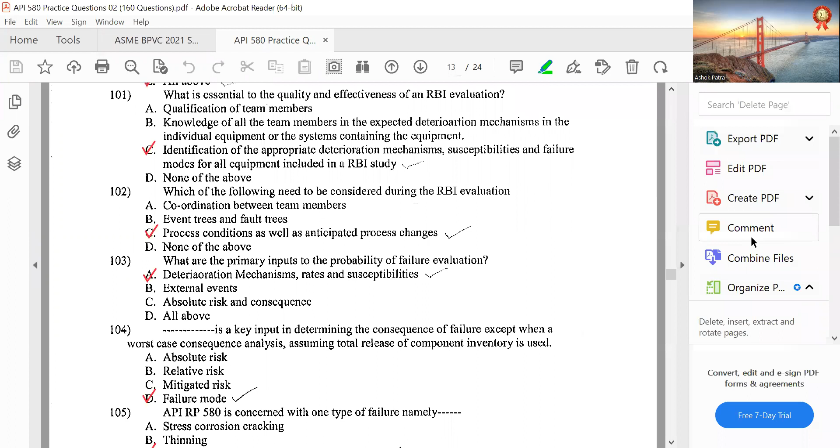API 580. So, what is essential to the quality and effectiveness of RBI evaluation? Identification of appropriate deterioration mechanisms, susceptibilities, and failure modes for all equipment included in an RBI study.

Which of the following need to be considered during RBI evaluation? Process conditions as well as anticipated process changes. What are the primary inputs to the probability of failure evaluation? Deterioration mechanisms, rates or susceptibilities.

Blank is a key input for determining the consequences of failure, except when a worst case consequence analysis, assuming total release of component inventory, is used. Failure mode. API RP 580 is concerned with one type of failure, namely loss of containment caused by deterioration.

Which one of the following is a deterioration mechanism observed in the hydrocarbon and chemical process industry? All of the above: thinning, stress corrosion cracking, metallurgical and environmental, mechanical, all of the above.

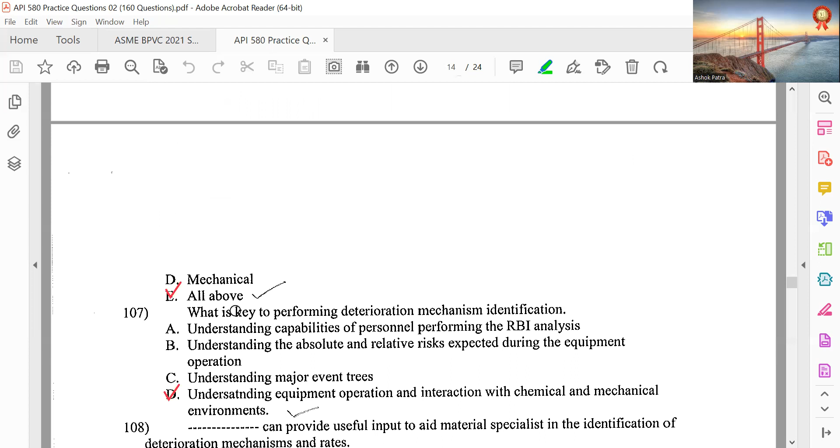What are key to performing deterioration mechanism identification? Understanding equipment operation and its interaction with chemical and mechanical environments. Process specialists can provide useful input to aid materials specialists in the identification of deterioration mechanisms and rates.

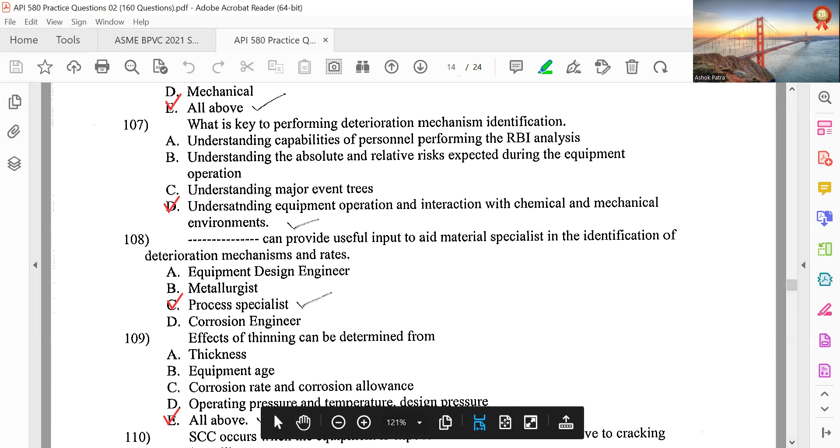The effect of thinning can be determined from thickness, equipment age, corrosion rate, corrosion allowance, operating pressure and temperature, design pressure, all of the above.

SCC occurs when the equipment is exposed to an environment conducive to the cracking mechanism, like caustic cracking, amine cracking, sulfide stress cracking, HIC, SOHIC, all of the above. Stress corrosion cracking: fabrication variables such as post-weld heat treatment, PWHT, can affect susceptibility to SCC.

True. Determination of susceptibility to SCC should not only consider the susceptibility of the equipment or piping to cracking, but also the probability of a crack resulting in a leak or rupture. One example of metallurgical and environmental failure is high temperature hydrogen attack in carbon and low alloy steel.

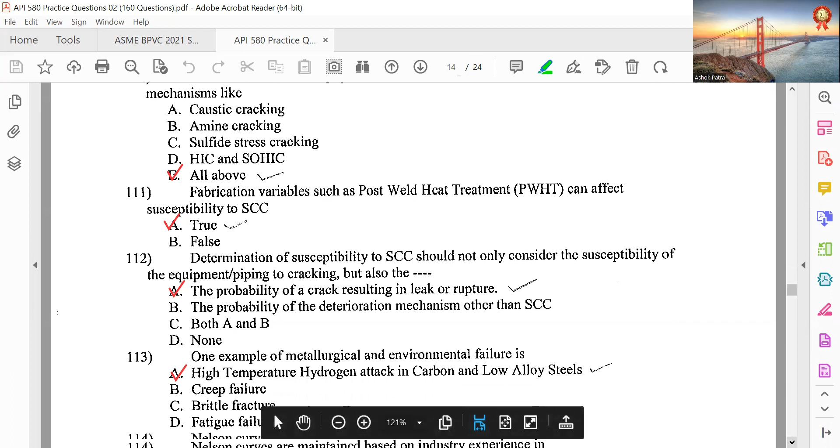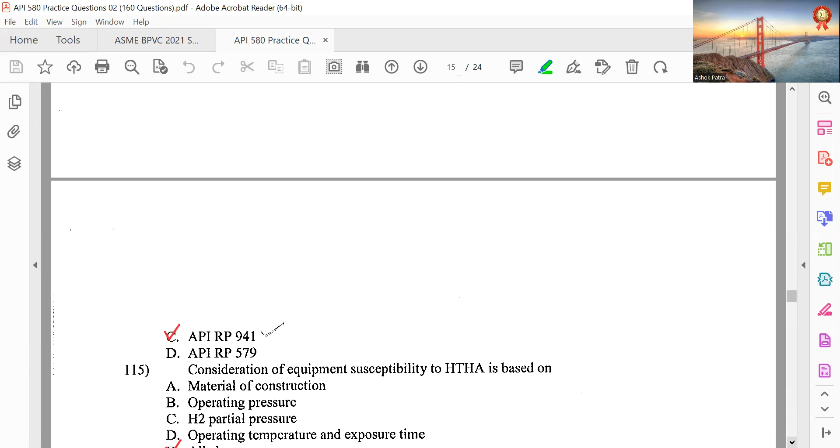Nelson curves are maintained based on industry experience in API RP 941. Consideration of equipment susceptibility to HTHA is based on material of construction, operating pressure, H2 partial pressure, operating temperature, and exposure time, all of the above.

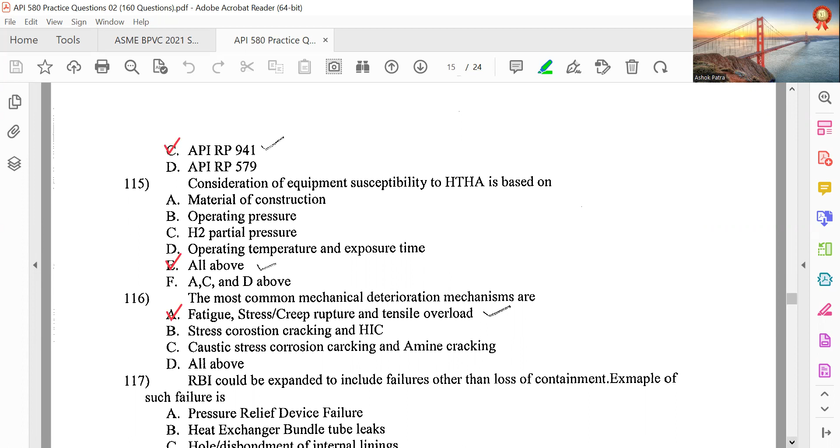The most common mechanical deterioration mechanisms are fatigue, stress, creep rupture, and tensile overload. RBI could be expanded to include failures other than loss of containment. Examples of such failures: pressure relief device failure, heat exchanger bundle tube failure, leaks, disbondment of internal linings.

Deterioration mechanisms are not the only cause of loss of containment. Examples of other causes are seismic activity, operator error, overpressure due to failure of a pressure relief device.

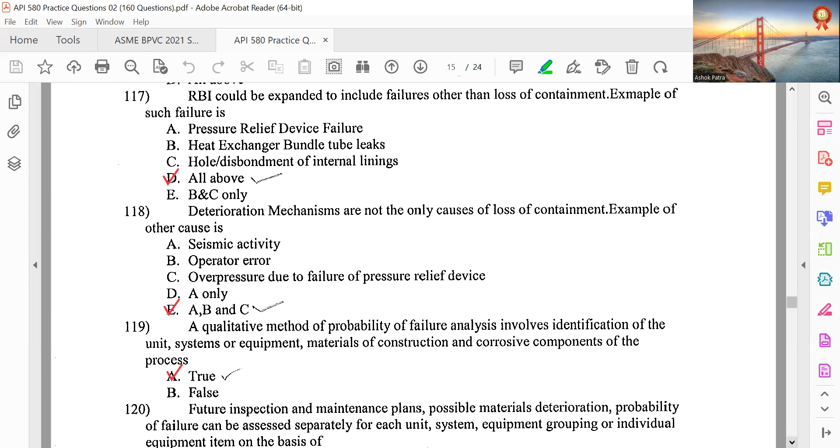A qualitative method for probability of failure analysis involves identification of the unit, system or equipment, materials of construction, and corrosive components of the process. True. Future inspection and maintenance plans, possible material deterioration, probability of failure can be assessed separately for each unit, system, equipment grouping, or individual equipment items on the basis of knowledge and operating history.

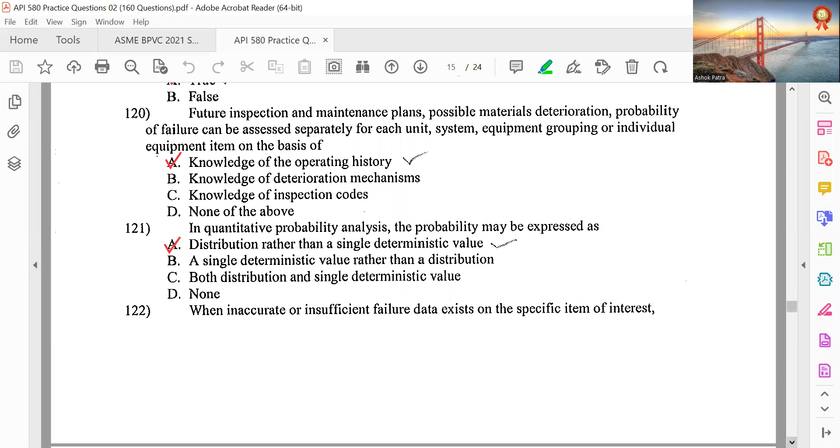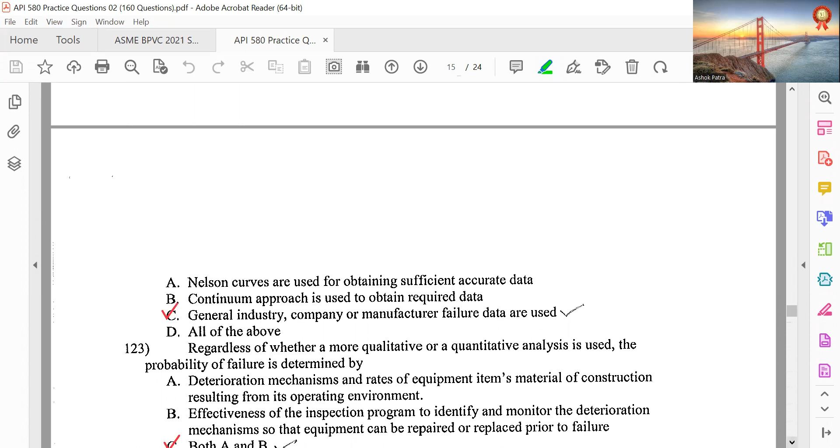In quantitative probability analysis, the probability may be expressed as a distribution rather than a single deterministic value. When inaccurate or insufficient failure data exists on the specific item of interest, general industry, company, or manufacturer failure data are used.

Regardless of whether a more qualitative or quantitative analysis is used, the probability of failure is determined by deterioration mechanisms and rates of the equipment item's material of construction resulting from its operating environment, and the effectiveness of the inspection program to identify and monitor the deterioration mechanism so that the equipment can be repaired or replaced prior to failure.

Analyzing the effect of in-service deterioration and inspection on probability of failure involves all of the above: identifying active and credible deterioration mechanisms reasonably expected to occur during the period being considered, determining deterioration susceptibility and rate, quantifying the effectiveness of the past inspection and maintenance program and the proposed future inspection and maintenance program, determining the probability that with the current condition, continued deterioration at the expected rate will exceed the damage tolerance and result in a failure.

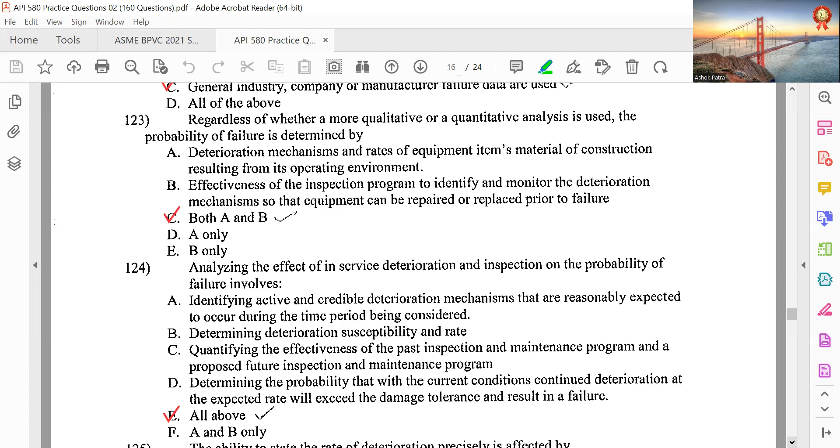The ability to state the rate of deterioration precisely is affected by equipment complexity, type of deterioration mechanism, process and metallurgical variations, inaccessibility for inspection, limitations of inspection and test methods, and inspector expertise.

Sources of deterioration rate information include published data, laboratory testing, in-situ testing and in-service monitoring, experience with similar equipment, previous inspection data, all of the above. Other sources of information on deterioration are databases, plant experience, or reliance on expert opinion.

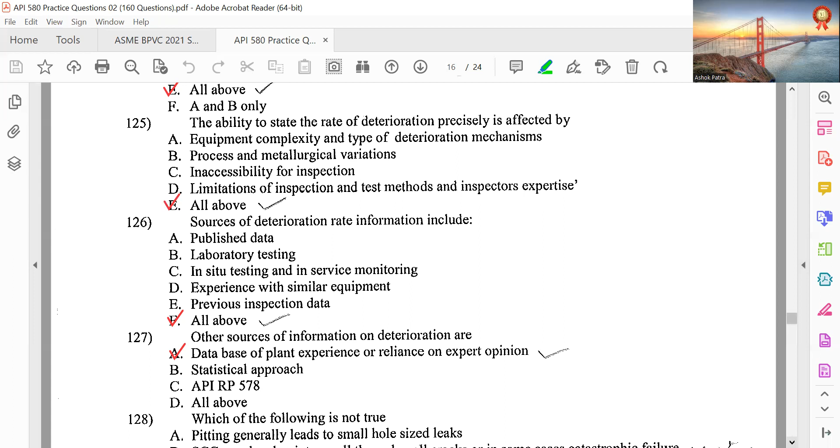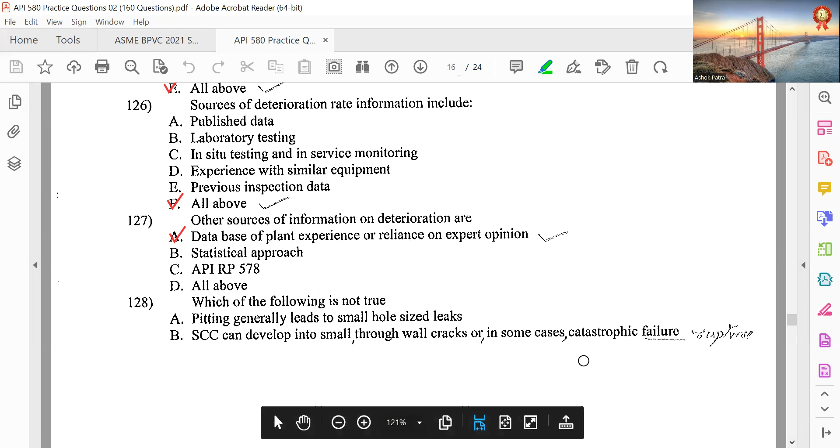Which of the following is not true? General thinning from corrosion often leads to small leaks. Pitting generally leads to small hole-sized leaks. SCC can develop into small through-wall cracks or in some cases catastrophic failure. Metallurgical deterioration and mechanical deterioration can lead to failure modes that vary from small holes to rupture. The last three are true. The first one is not true.

After likely deterioration mechanisms have been identified, the inspection program should be evaluated to determine its effectiveness in finding the identified mechanisms.

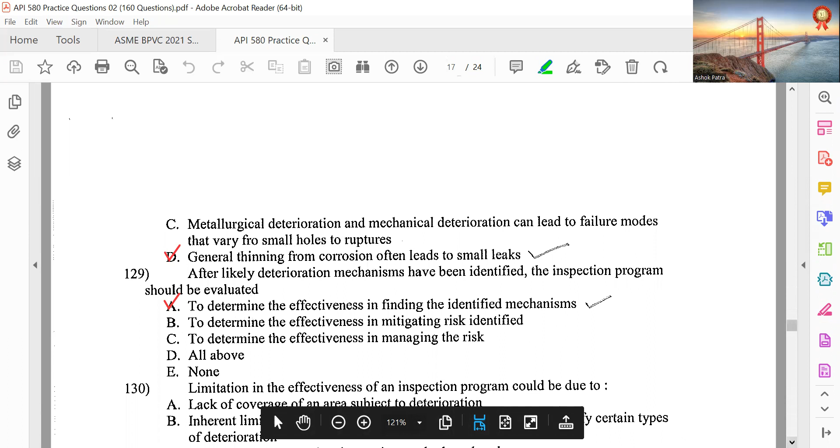Limitation in the effectiveness of an inspection program could be due to lack of coverage of an area subjected to deterioration, inherent limitations of some inspection methods to detect and quantify certain types of deterioration, selection of inappropriate inspection methods and tools, all of the above.

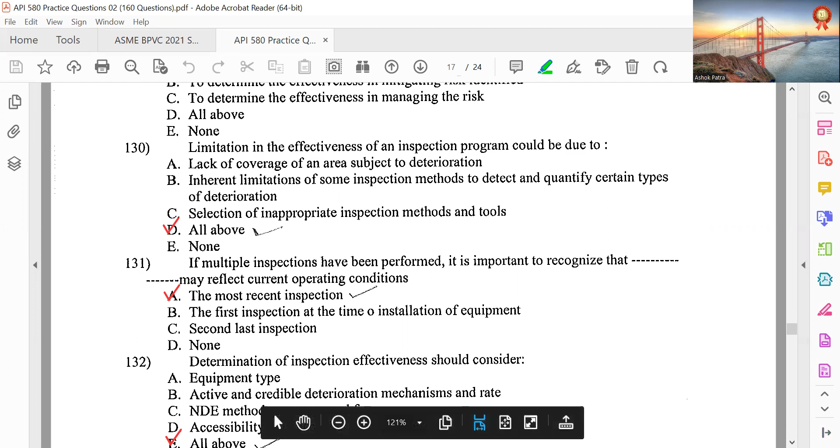If multiple inspections have been performed, it is important to recognize that the most recent inspection may reflect current operating conditions. Determination of inspection effectiveness should consider equipment type, active and credible deterioration mechanisms, NDE methods, coverage and frequency, accessibility to expected deterioration areas, all of the above.

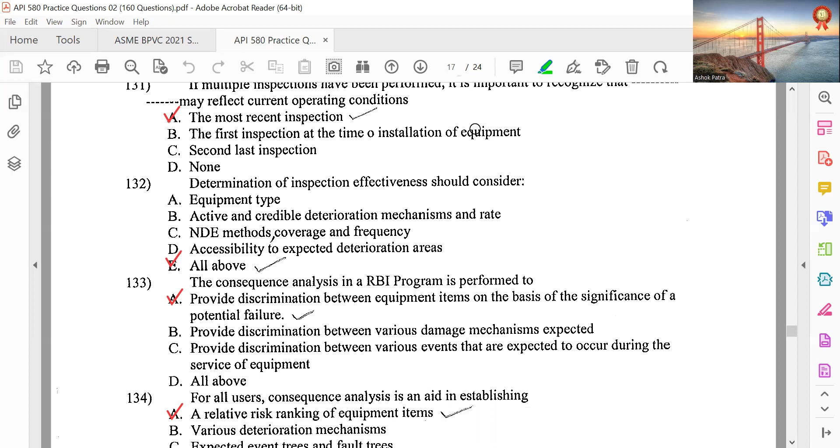The consequence analysis in the RBI program is performed to provide discrimination between equipment items on the basis of significance of a potential failure. For all users, consequence analysis is an aid in establishing a relative risk ranking of equipment items.

The consequence effects of loss of containment can be generally considered to be safety and health impact, environmental impact, production losses, maintenance and construction losses, all of the above. Functional failures other than loss of containment should include functional or mechanical failure of internal components of pressure equipment, heat exchanger tube failure, pressure relief device failure, rotating equipment failure, all of the above. The other functional failures are usually covered within RCM and therefore not covered in API 580.

Quantitative and qualitative approaches of consequence analysis are endpoints of a continuum. The other functional failures are usually covered within RCM and therefore not covered in API 580. Qualitative and quantitative approaches of consequence analysis are endpoints of a continuum.

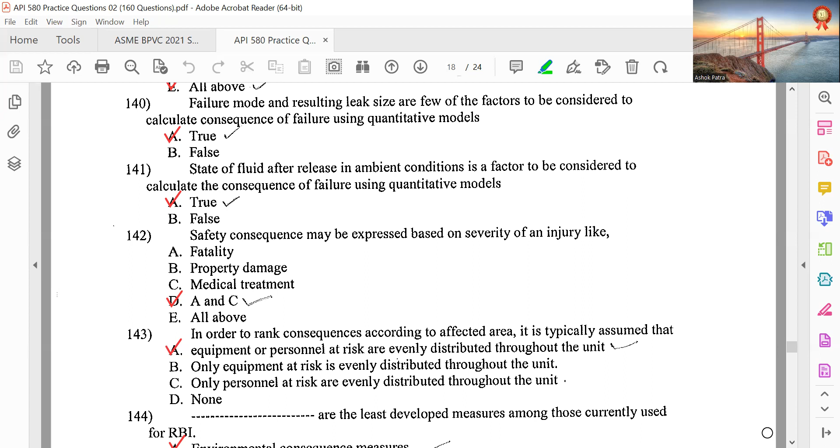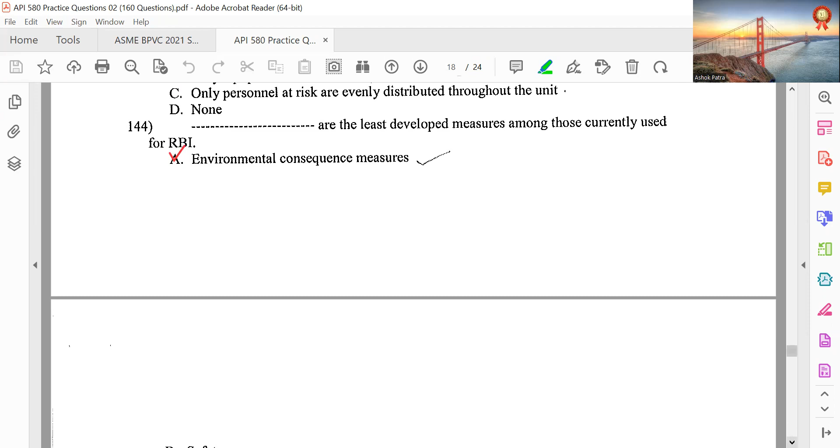State of fluid after release in ambient conditions is a factor considered to calculate the consequences of failure using quantitative models. True. Safety consequences may be expressed based on severity of injury. In order to rank consequences according to affected area, it is typically assumed that equipment or personnel at risk are evenly distributed throughout the unit. Environmental consequence measures are the least developed among those currently used in RBI.

Typical parameters that provide an indirect measure of the degree of environmental damage are acres of land affected per year, miles of shoreline affected per year, number of biological or human use resources consumed. So all of the above. In most consequence evaluations, a key element in determining the magnitude of consequences is the volume of fluid released. In all cases, volume released will be the same as volume available for release.

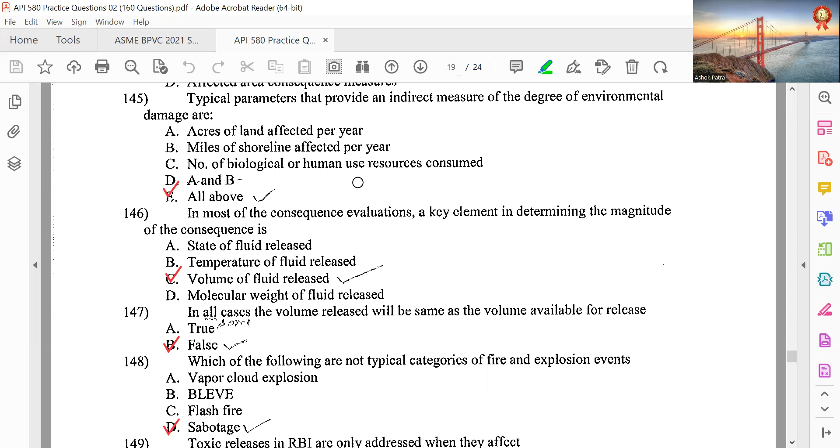False. Which of the following are not typical categories of fire and explosion events? Sabotage. Toxic releases in RBI are only addressed when they affect personnel. While considering consequences due to toxic release, RBI programs typically focus on acute toxic risks that create an immediate danger.

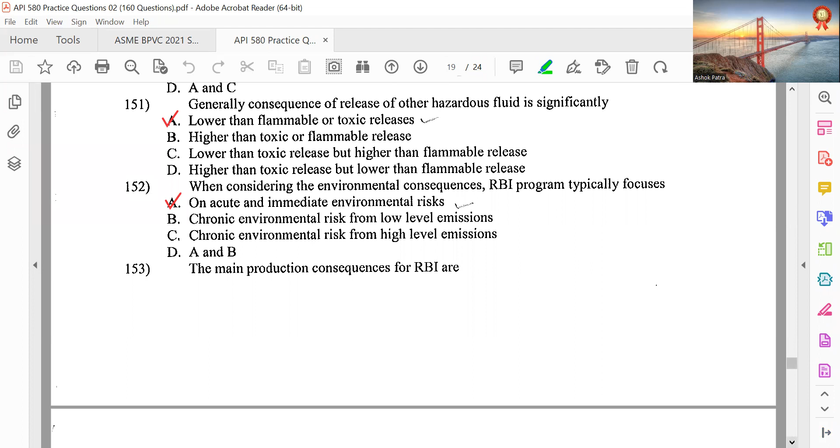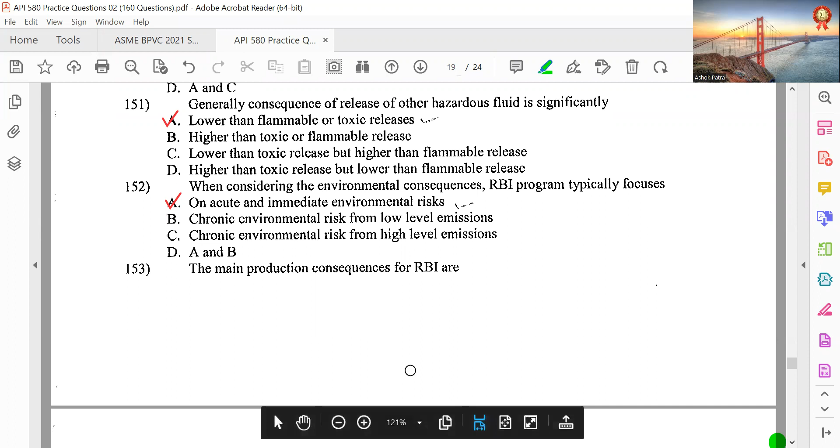Generally, consequences of releases of other hazardous fluids are significantly lower than flammable or toxic releases. When considering the environmental consequences, RBI programs typically focus on acute and immediate environmental risks. The main production consequences of RBI are financial.

Business interruption consequences: process unit daily value times downtime in days. Dow Fire and Explosion Index is a typical method of estimating the downtime after a fire or explosion. Loss of containment failure may only be the first event in a series of events that lead to a consequence. The probability of specific consequences is tied to the severity of consequence and may differ considerably from probability of equipment failure itself.

Loss of containment failure may only be the first event in a series of events that lead to a consequence. The probability of specific consequences is tied to the severity of consequence and may differ considerably from probability of the equipment failure itself. Probability of incident generally decreases with severity of incident. Personnel inexperienced in risk assessment methods often link the probability of failure with the most severe consequences that can be envisioned. Probability of a specific consequence is the product of the probability of each event leading up to the specific consequence.